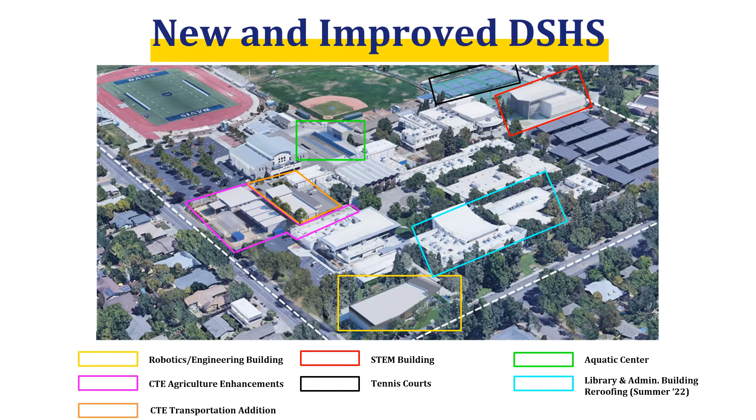Davis Senior High School has a long and very successful career technical education program. While CTE programs have developed and grown, the performance of the CTE facilities have not. In 2020, DJUSD submitted state CTE facility grant applications for the agriculture, transportation, and engineering robotics pathways. The grant applications were approved in late 2020, and as a result, Davis High received $6.2 million in state CTE funds, which will be matched with $8.3 million in Measure M funds to complete CTE projects at the high school.

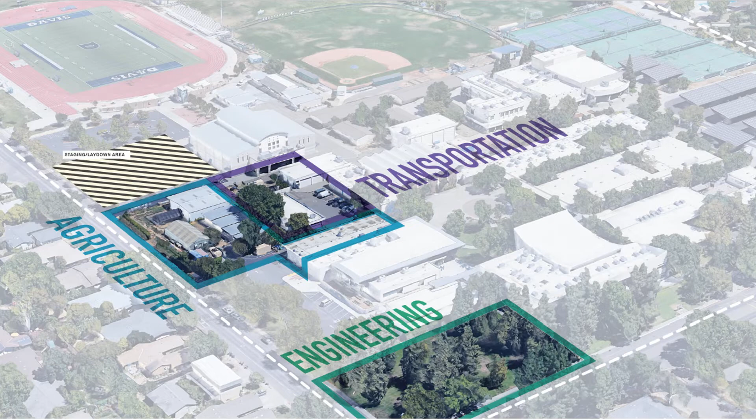Improvements will include enhancements for the engineering, robotics, transportation, and agriculture programs at Davis High. CTE construction activity will occur on the western portion of the campus. The southern half of the stadium parking lot will be used as a construction yard to store materials and support all three CTE project enhancements. Construction activities are anticipated to begin this spring.

Beginning in the spring of 2022, the CTE agriculture pathway will begin improvements to existing shops, the barn and greenhouse, a shade structure, and the animal care area. During program construction, the high school ag classes, staff, and students will be temporarily housed in other classrooms on site. Temporary housing for livestock, however, is currently being determined.

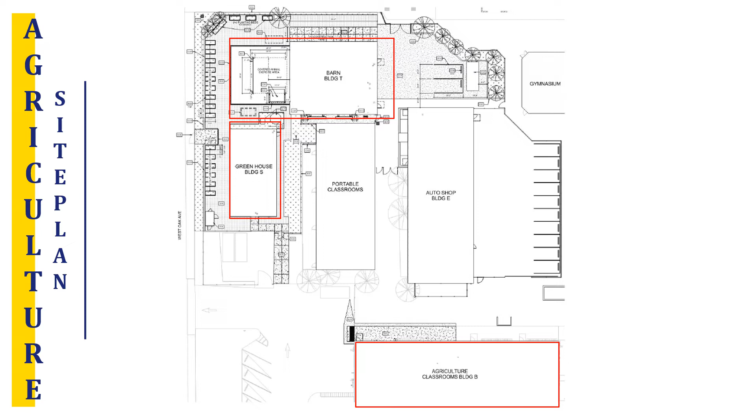Construction activities for the Ag CTE projects will occur in the Ag classroom, just north of the All-Student Center, the Ag barn, and the greenhouse. Each of these buildings are outlined in red.

There will be extensive improvements to the Ag building, which will include 14 welding booths, 8 student octagon tables, a new air compressor room, and a new staff room. New electrical infrastructure will also be provided, which will support the new welding and fabrication equipment.

Furthermore, enhancements will be made to the animal care facilities and the greenhouse, highlighting a new tool shed, retaining wall, animal exercise ring, and additional pens.

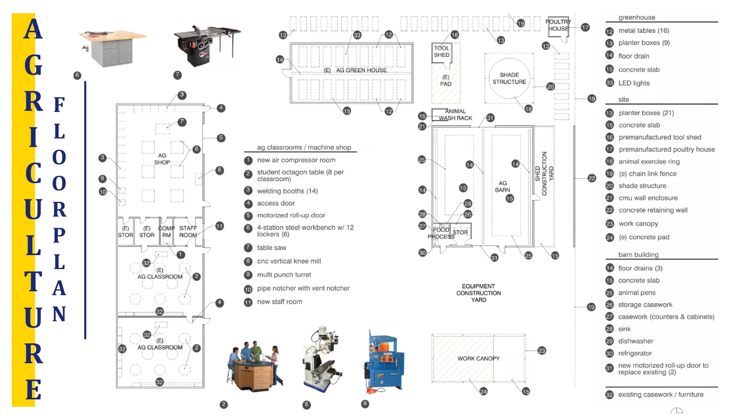Concurrent to the CTE Ag program improvements, the transportation pathway will focus on the expansion of a new vehicle bay, specifically designed to support electric vehicles. During construction, students and staff will continue to have access to the existing classroom and vehicle bays. The floor plan for existing bays are pictured here in the shaded area.

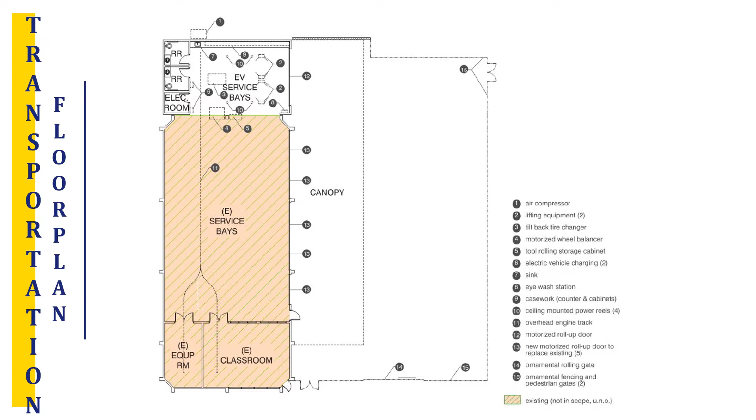Rolling into our third CTE program, the success of the Davis High Robotics Engineering pathway speaks for itself, and the program has done an amazing job given the limitations of the existing facilities. Beginning in spring 2022, this project will provide a long overdue expansion of the robotics engineering facilities by constructing 2 additional classrooms and enhancing existing robotics spaces as well.

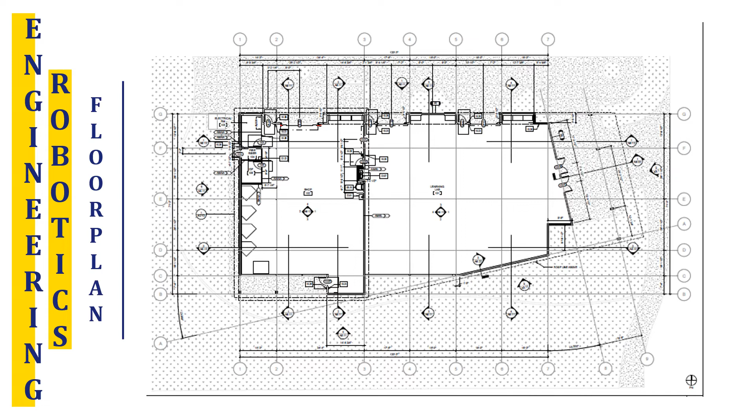The centerpiece of the engineering robotics project is a 7,800 square foot expansion. This new building will be constructed immediately south of the existing robotics rooms and will provide new fabrication space and an appropriate robotics competition space.

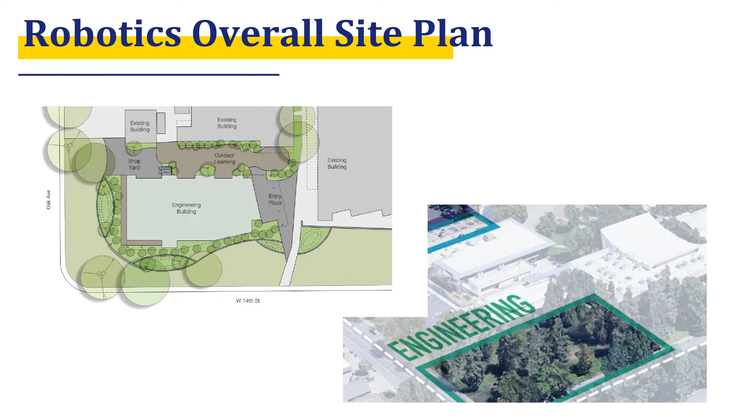The footprint of the planned project is significant and will infill the majority of the open space at the corner of 14th Street and Oak Avenue. In addition to the new building, new landscaping, including required bioswales, will also be constructed.

Since the Davis High campus and site are essentially built out, and given the location of the existing robotics engineering facilities, the only feasible location for the new space is the southwest corner of the school site. Unfortunately, this placement requires the removal of existing trees. We value our trees and their benefits to our community and environment. The loss of these trees will be offset by the planting of at least 30 new trees at Davis High over the course of the next 24 months.

With a project budget of $31.2 million, the new Davis Senior High School STEM building is the single largest project in the Measure M Bond program. This project showcases the importance of the sciences to the high school as well. This will be an immense building placed on the east side of campus, adjacent to the Brunelle Theater. Construction start is anticipated for summer 2022, with completion for fall 2023.

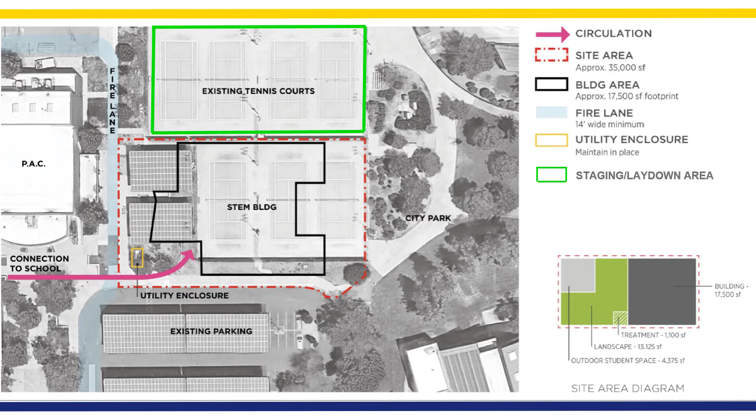2 new outdoor learning areas will complement the new building. The garden, to the west of the building, will provide learning opportunities to explore environmental education, and the yard on the east side of the building will provide space for gathering and student work.

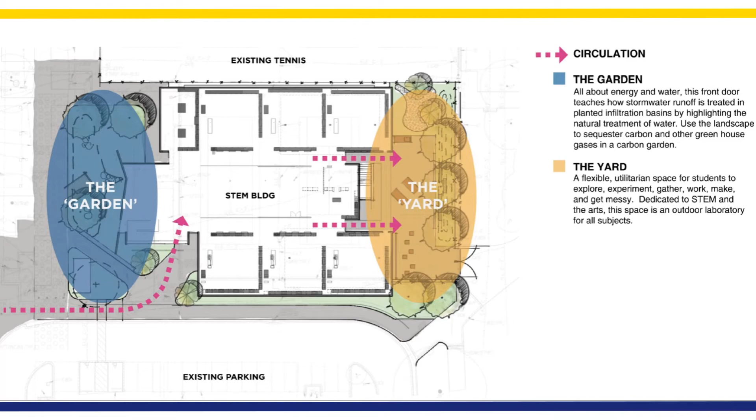This is the design for the first floor of the STEM building. It showcases 6 new classrooms, storage areas, and support spaces, and includes the provision of student, staff, and all-gender restrooms.

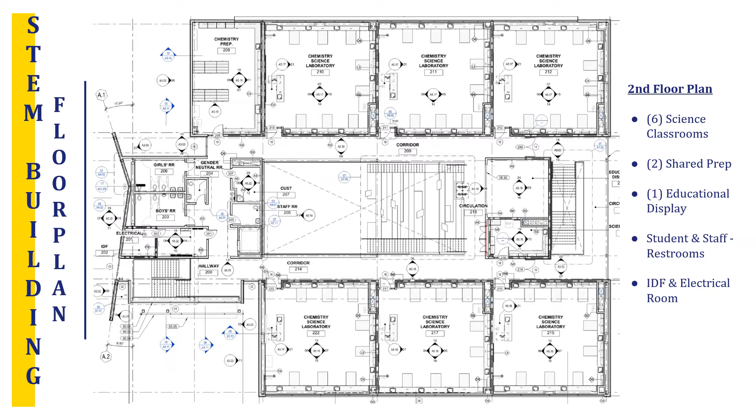The second floor of the STEM building is similar to that of the first and will also comprise 6 additional classrooms, added storage areas, as well as support spaces. Student, staff, and all-gender restrooms will also be provided on this floor. This exciting 2-story, 17,500 square foot building will provide a new focal point for the east side of Davis Senior High School.

To further expand on the construction of the new STEM building, we understand it will have a significant impact to the high school and community tennis players, and we are preparing plans to mitigate these impacts.

DJUSD has hired a design team to plan and prepare cost estimates to possibly construct 3 new tennis courts to the north of the existing row of 5 courts, repair and resurface 9 existing courts, and shift the existing soccer field and lights to the north in an effort to accommodate the planned 3 new courts. Upon the completion of the STEM building and pending construction cost estimates and project approval of the additional 3 courts, there will be no net loss of courts.

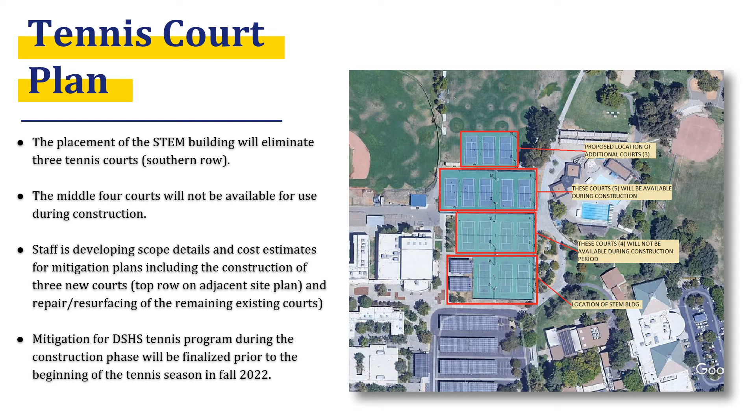Our final bond project at Davis High is the new Aquatic Center. Davis has a robust aquatics community, and since the high school was constructed without a pool, the Davis High swimming and water polo programs must practice and play at off-site pools. Additionally, there is no opportunity for aquatic PE courses, water safety education, or community aquatics at the high school. That will soon change with the completion of the new Aquatic Center.

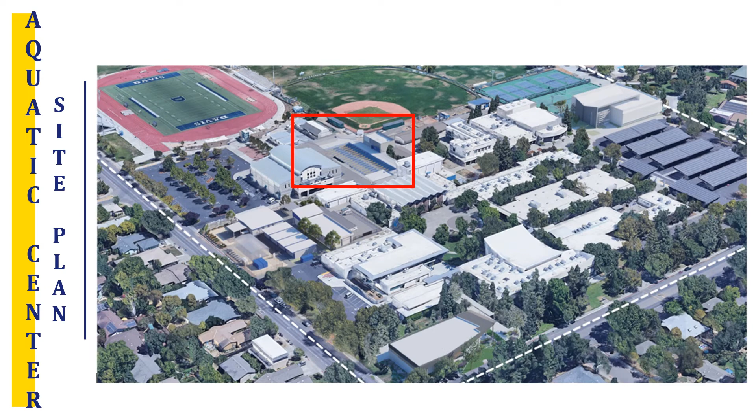Beginning in the fall of 2023, construction for this project will include 17 lanes, 2 1-meter diving boards, space for regulation floating goal water polo courses, as well as changing rooms, restrooms, an equipment room, and deck and spectator spaces. Using the visual of the future Davis Senior High School site plan, the new Aquatic Center will be constructed immediately to the east of the North Gym.

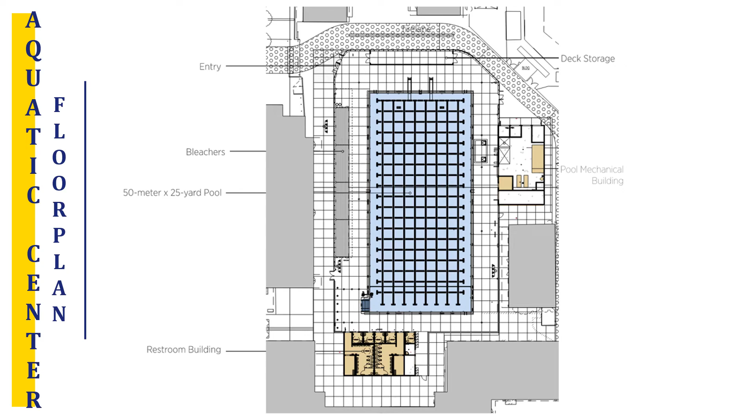This is the floor plan view of the new Aquatic Center. It shows the 17-lane pool, the new changing rooms and restrooms, bleachers to accommodate spectators, and the new mechanical building to the right. It is important to note that DJUSD remains committed to the Aquatic Center, and construction for this exciting new facility will begin in fall 2023, immediately following the completion of the STEM building.

In the early stages of planning bond projects at Davis High, a simultaneous build of the STEM building and Aquatic Center was considered. However, with the hiring of contractors, each project's scope is now more clearly defined. The simultaneous build of both projects would have significant influence on the student and staff parking, day-to-day school operations, and the safety of pedestrian flow on site.

Of paramount importance is that the construction of the Aquatic Center will require the removal of 10 existing portable classrooms, which pre-planning committees at Davis High agree would put an unreasonable burden on the education programs, students, and staff at Davis High. The decision for a consecutive build of the STEM building, followed by the Aquatic Center, allows the provision of 12 new classrooms in the STEM building to absorb the loss of the aforementioned 10 portable classrooms. Consecutive construction will also have a less impactful presence on campus and for the Davis High community as a whole.